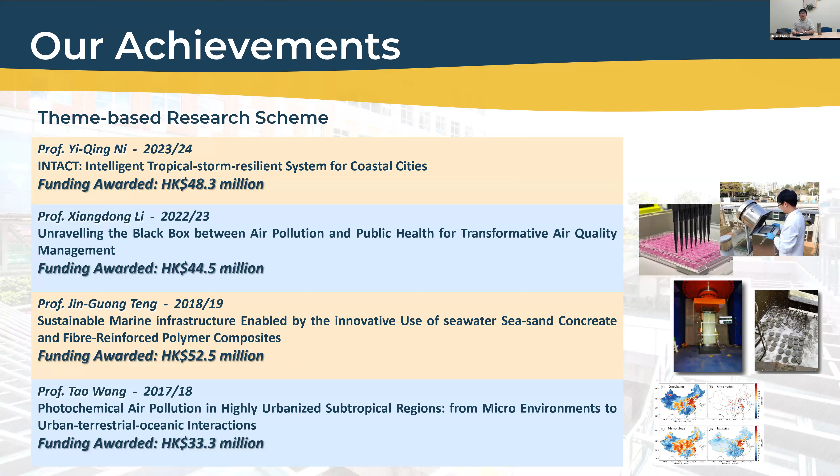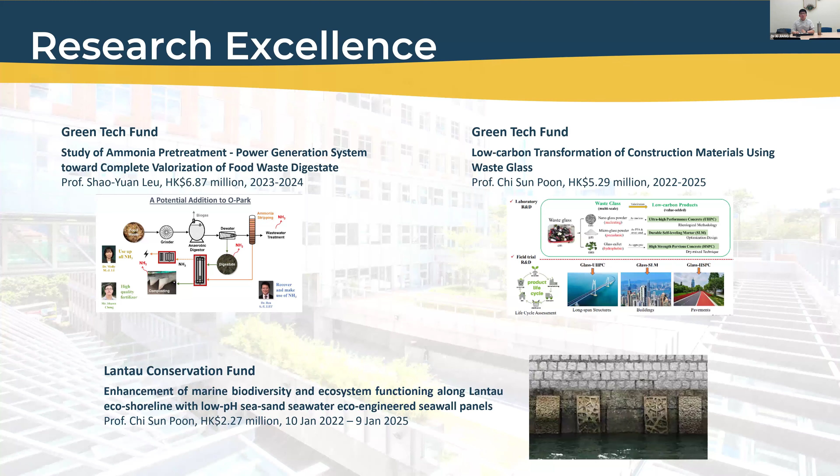We also have very good achievements in projects, such as the theme-based research scheme from Professor Ni, Professor Li Xiangdong, Professor Teng Jinguang, and Professor Wang Tao. We also obtained many special funds, such as the GTF, the Lantau Conservation Fund, the RGC Collaborative Research Fund, and Impact Fund.

Our academic programs are also very good. For undergraduate programs, we have Bachelor of Engineering degree in Civil Engineering, and in Environmental Engineering and Sustainable Development. We also have taught and research postgraduate programs, Master of Science in Civil Engineering and Master of Science in Environmental Management and Engineering. For the research postgraduate program, we have MPhil and also PhD.

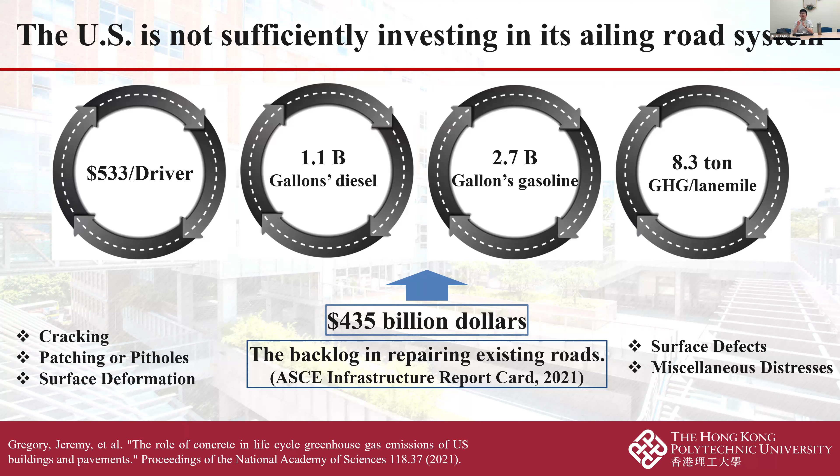Based on the ASCE, American Society of Civil Engineers Infrastructure Report Card in 2021, due to the distress of pavements in the states, such as cracking, patching, potholes, surface deformation, and surface defects, the government needs to pay $435 billion to repair existing roads. Under such circumstances, we need a new pavement structure which can both save materials and offer good properties of pavements. Today I would like to introduce one novel or unconventional pavement structure.

Its name is inverted pavement. We consider the inverted pavement as a good alternative to our conventional flexible asphalt pavement. Inverted pavement is a kind of flexible pavement structure where an unbound aggregate base (UAB) is sandwiched between a cement-treated base (CTB) and a thin asphalt concrete surface layer. Here I give you a figure: the surface layer is asphalt concrete layer, the interlayer is unbound aggregate layer, and above the subgrade soil we have the cement-treated base. So this structure looks like a sandwich, and many scholars also give this pavement structure the name sandwich pavement.

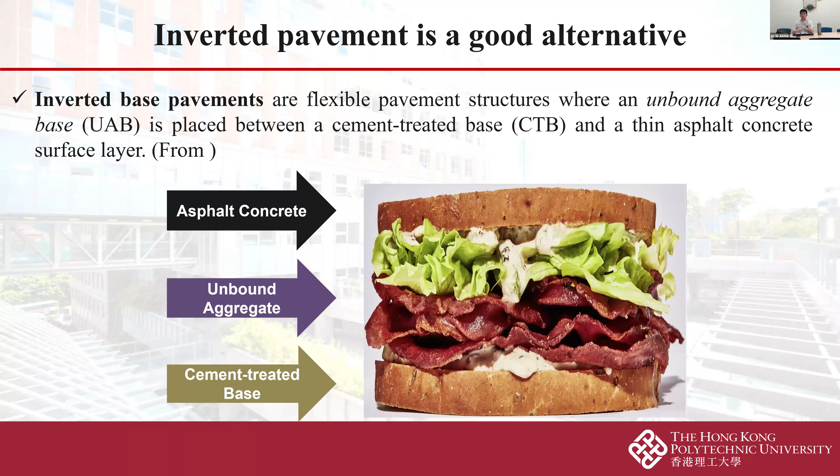Here I give a comparison study between the conventional pavement in Hong Kong and the inverted pavement structure. As you can see between the two figures, there are several differences between the two pavement structures. One is the sequence of the pavement layers.

In the conventional pavement in Hong Kong, we have the asphalt layer, unbound aggregate layer, and subgrade soil layer, just 3 layers. The modulus from the top to the bottom is decreasing with the depth of the pavement.

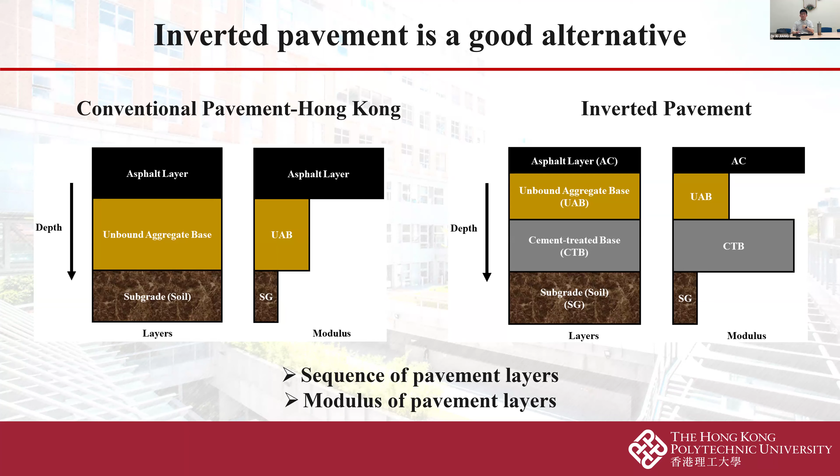However, in the inverted pavement, first of all, we have 4 layers. The surface is also the asphalt layer. Below the asphalt is the unbound aggregate base layer and cement treated base layer and subgrade soil. So as you can see, the lowest modulus layer, the unbound aggregate base, is

inserted between the asphalt layer and the cement treated base layer, which have much higher modulus. So, research gaps - why do we investigate the inverted pavement? The first gap is the limited comprehensive investigation correlating the field performance with the structural capacity of inverted pavements.

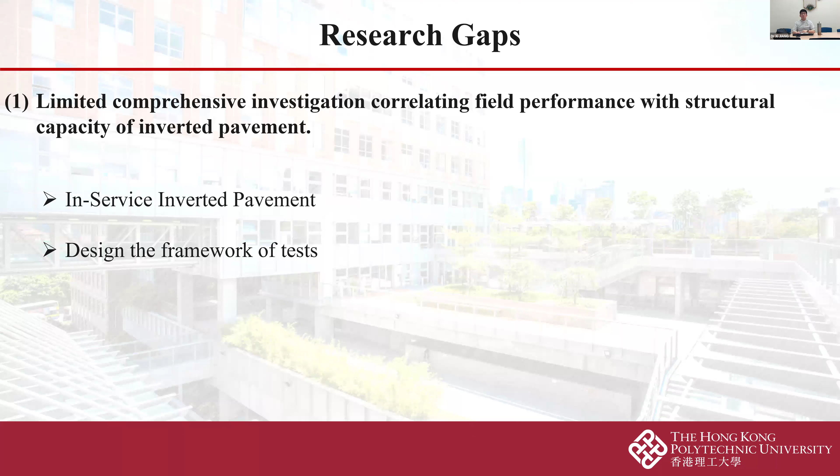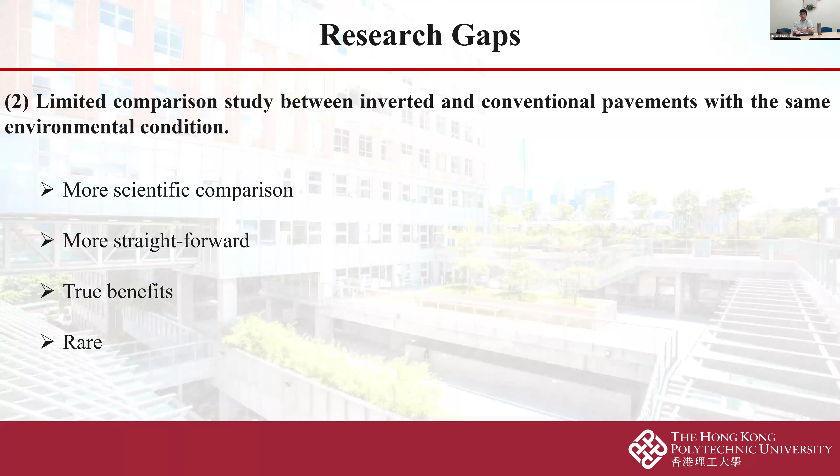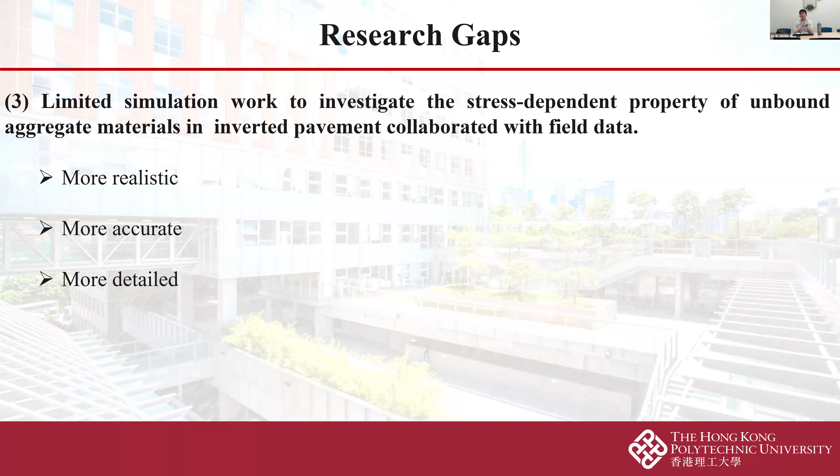We need to conduct experiments on the in-service inverted pavement, and we have to design a comprehensive framework of testing. The second gap is the limited comparison study between the inverted and conventional pavements under the same environmental conditions, such as traffic loads and the same temperature. The third research gap is the limited simulation work to investigate the stress-dependent property of the unbound aggregate materials.

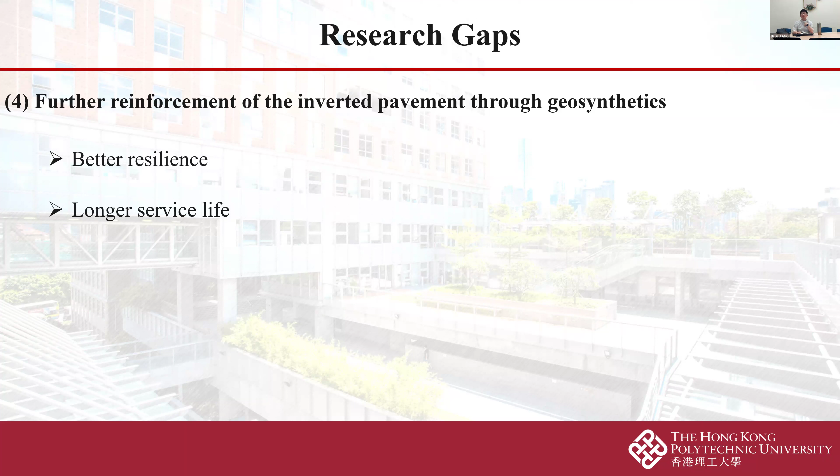Inverted pavement collaborated with the field data - the fourth one is for the reinforcement of the inverted pavement through geosynthetics. So here is the outline of the whole research project. The objective is to give a comprehensive investigation on the inverted pavement and advance the understanding of the inverted

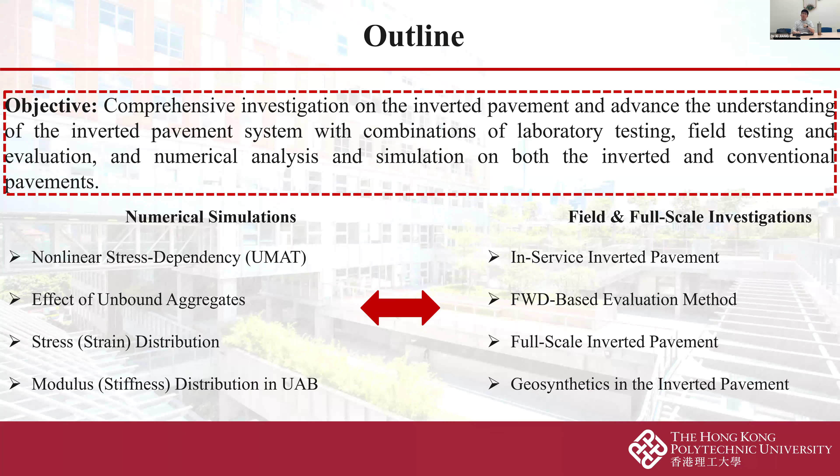pavement system with a combination of laboratory testing, field testing and evaluation, and numerical analysis and simulation on both the inverted and conventional pavements. So we need to conduct field and full-scale investigation, and we also need to do numerical simulations to verify our test results.

So here are the research contents. We have 5 steps. The first one: we have to do preliminary numerical simulations, focusing on the stress-dependent stiffness property of the unbound aggregate. Many years ago, we had the classical K-theta model to predict the stiffening characteristics of the unbound aggregate base.

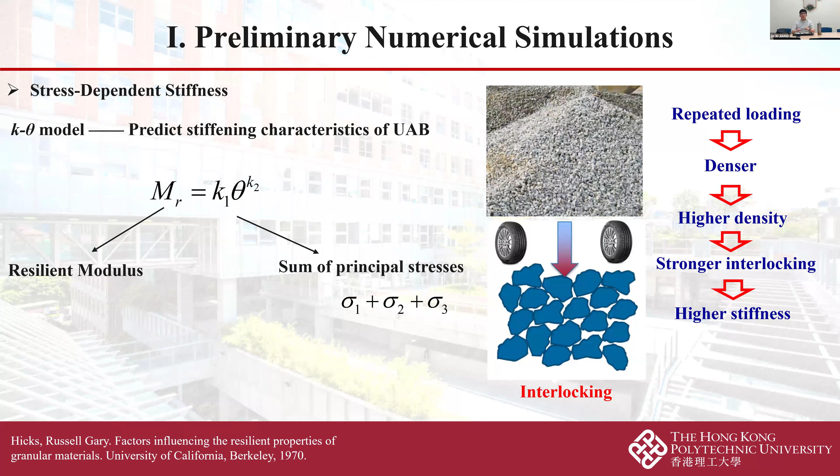Since we know that the aggregates, under repeated loading, will become denser and have higher density and stronger interlocking, and then higher stiffness. Due to this special property, we have to conduct simulation work to simulate the stress-dependent property.

So then we want to take the dimensional change into consideration. Then we have the shear stress component. In this constitutive model, the octahedral shear stress term is added to this model.

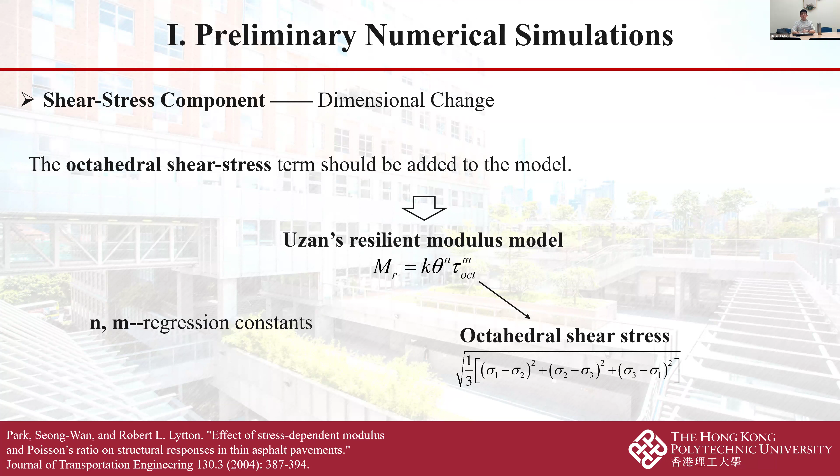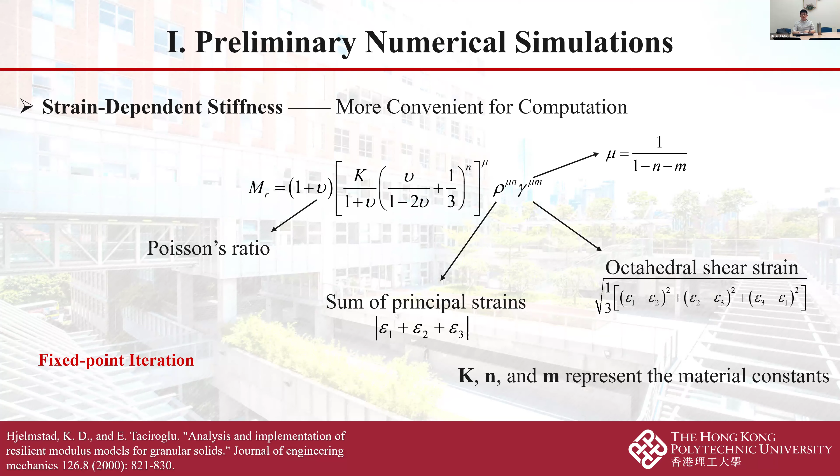This is the stress-dependent simulation model. In this model, especially when we use commercial simulation software such as Abaqus to do the calculation, we waste a lot of time and need more calculation capacity. So then we change the stress-dependent model to a strain-dependent model, which is more convenient for computation. In this strain-dependent model, we use the fixed point iteration.

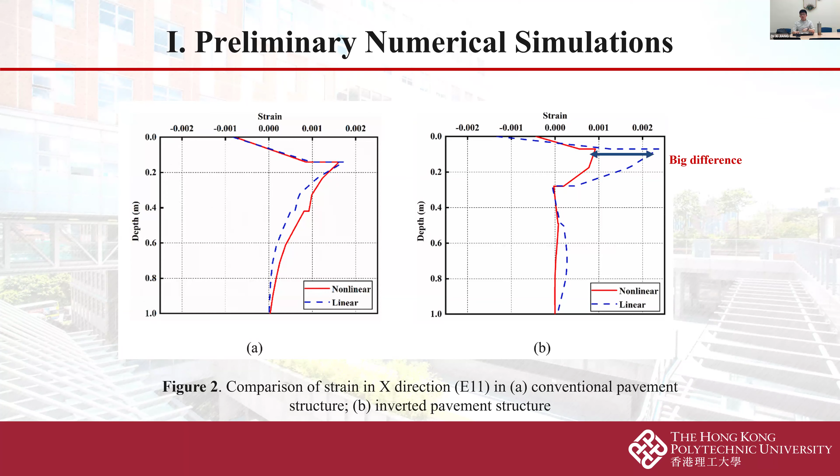So here are the simulation work results. I give you the comparison between the inverted pavement and the conventional pavement, using both the nonlinear model and the linear model. Here are the comparisons of the strain in the X direction, and we also compared the deflection in both the two different pavement structures.

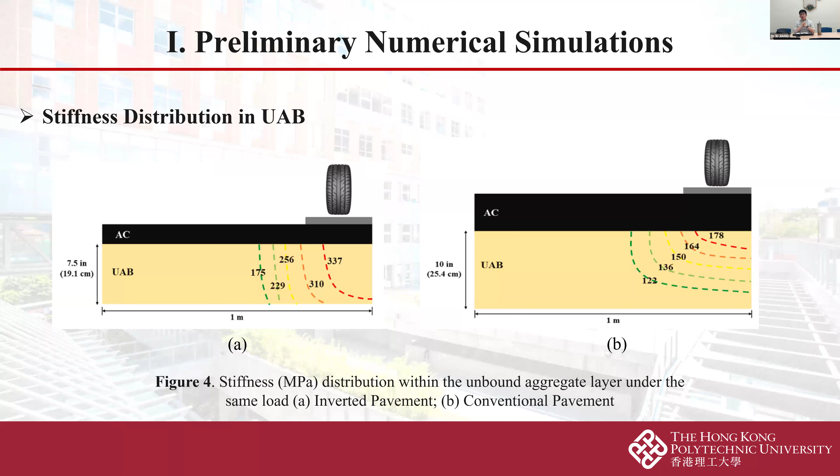And then we can have the output of the stiffness distribution within the unbound aggregate base. As you can see, figure A is the inverted pavement, figure B is the conventional pavement. In the unbound aggregate base of the inverted pavement, as the distance from the loading point or loading area increases, the stiffness or modulus of the unbound aggregate base will decrease a lot. However, in the conventional pavement, the stiffness of the unbound aggregate base didn't change a lot.

So we have the highlights for the preliminary numerical simulations. The first is that the nonlinear stress-dependent characteristic of the unbound aggregate base layer has a larger influence on the structural response of the inverted pavement, but little effect could be found in the conventional pavement.

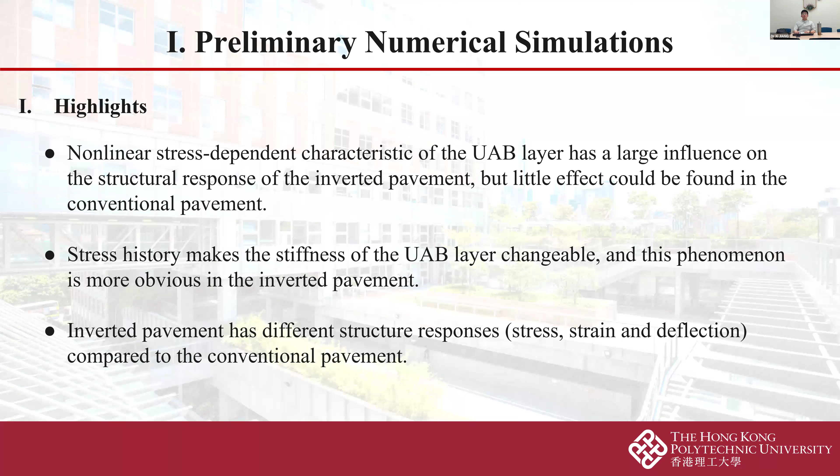The second is that stress history makes the stiffness of the unbound aggregate base layer changeable, and this phenomenon is more obvious in the inverted pavement. The last one is that the inverted pavement has different structural responses, such as stress, strain, and deflection, compared to the conventional flexible pavement structure in Hong Kong.

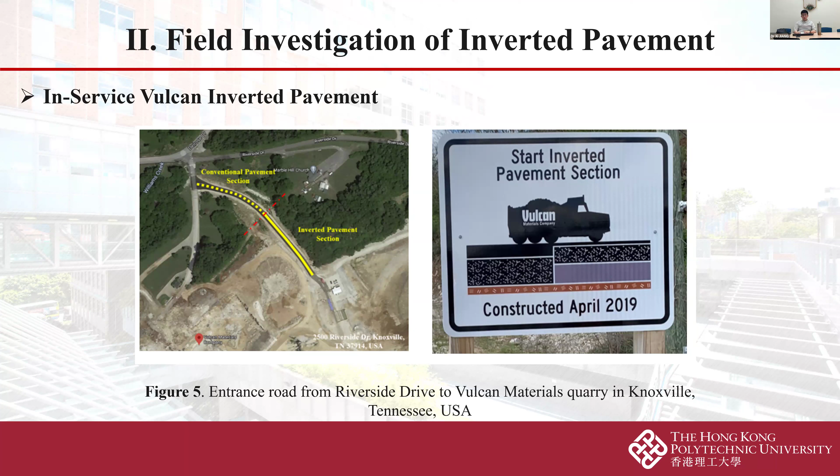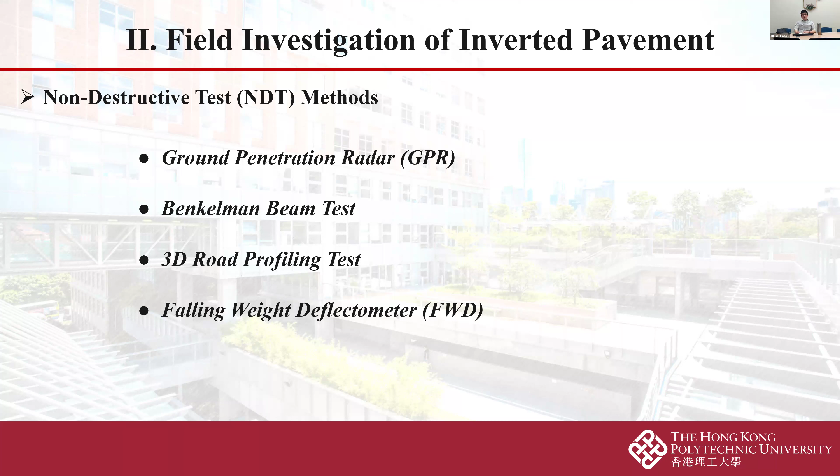After the preliminary numerical simulations, we have to do some tests for field investigation of the inverted pavement. We found an in-service inverted pavement in the city of Knoxville, Tennessee, in the United States of America. Firstly, we conducted non-destructive tests such as GPR (ground penetrating radar), Benkelman beam test, 3D road profiling test, and also the falling weight deflectometer. First of all, we conducted the GPR test to validate the pavement layer thickness.

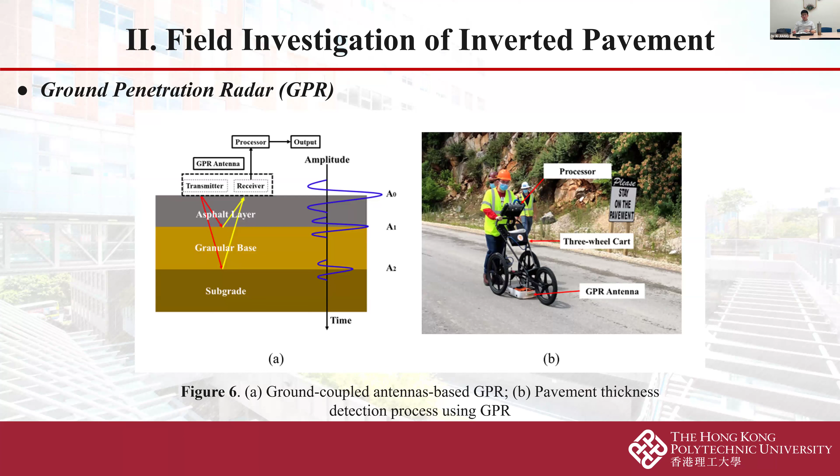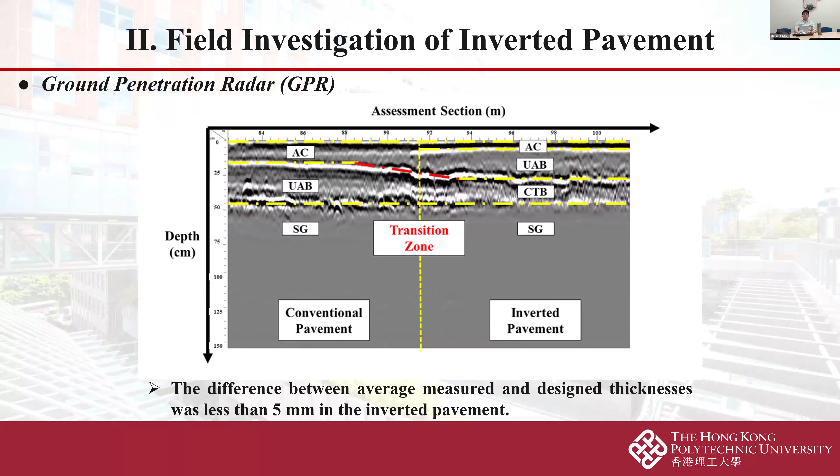Due to construction quality, sometimes we give you a design thickness for pavement structures, but the construction quality is not guaranteed, so there is some difference between design thickness and construction thickness. Based on the GPR results, we found that the difference between the average measured and designed thickness was less than 5 millimeters in the inverted pavement, showing that the construction quality is very good.

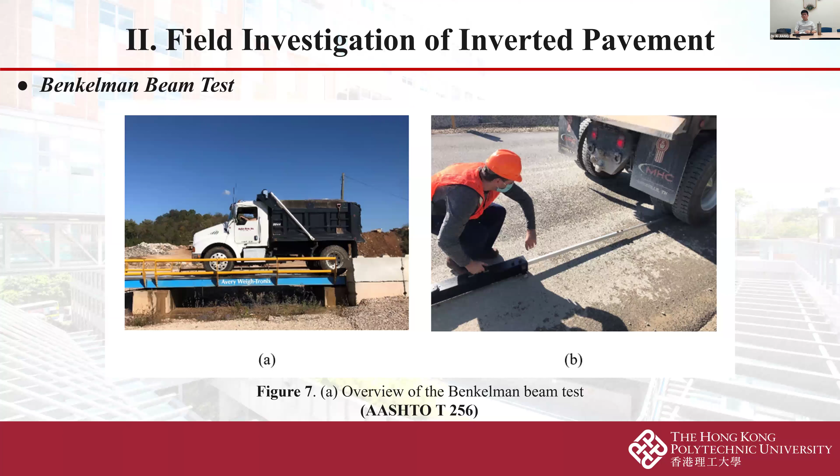So then we conducted the classic Benkelman beam test. Here are the figures showing an overview of the Benkelman beam test. Usually an 80 kilonewton test load is applied on a single rear axle, and the beam is placed between the tires so that the probe is 1.37 meters forward of the rear axle.

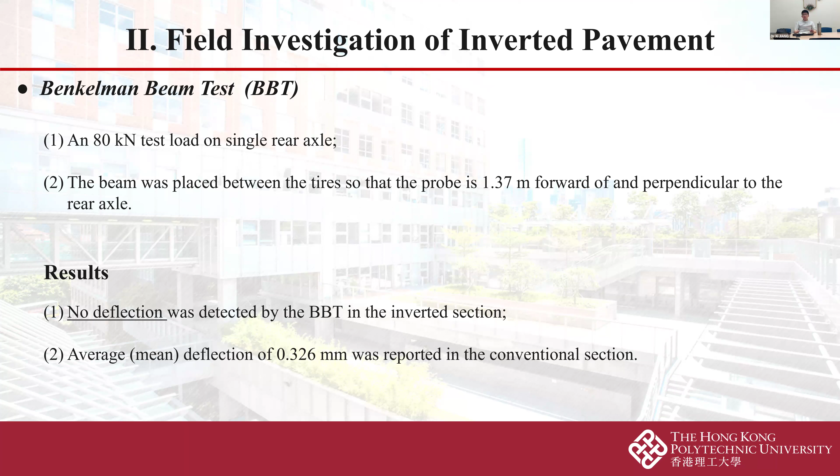So we have the results. First, no deflection was detected by the BBT in the inverted section. Second, an average deflection of 0.326 millimeters was reported in the conventional section. This means that the inverted pavement has a better condition compared to the conventional section.

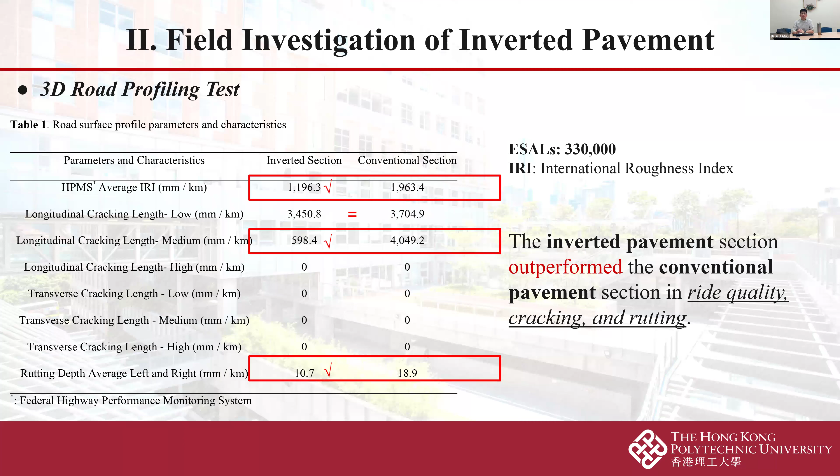Then we conducted the 3D road profiling test, measuring the cracking length in both the longitudinal and transverse directions. We also measured the IRI, the International Roughness Index, and the rutting depth. Based on the results, we found that the inverted pavement section outperformed the conventional pavement section in ride quality, cracking, and rutting as well.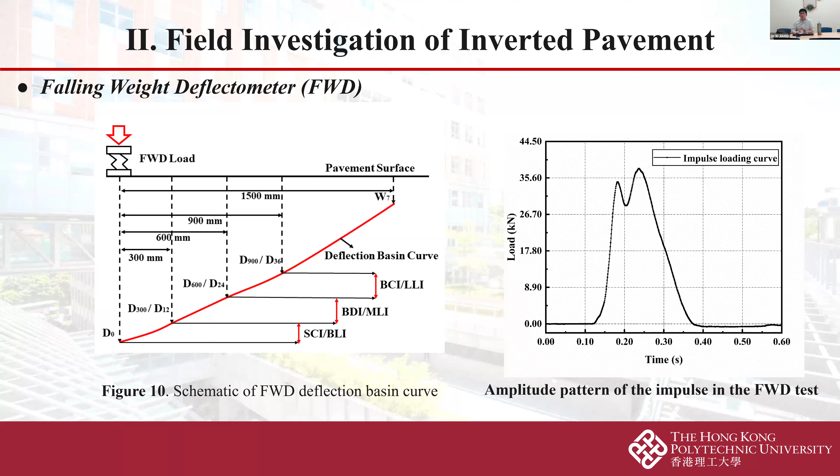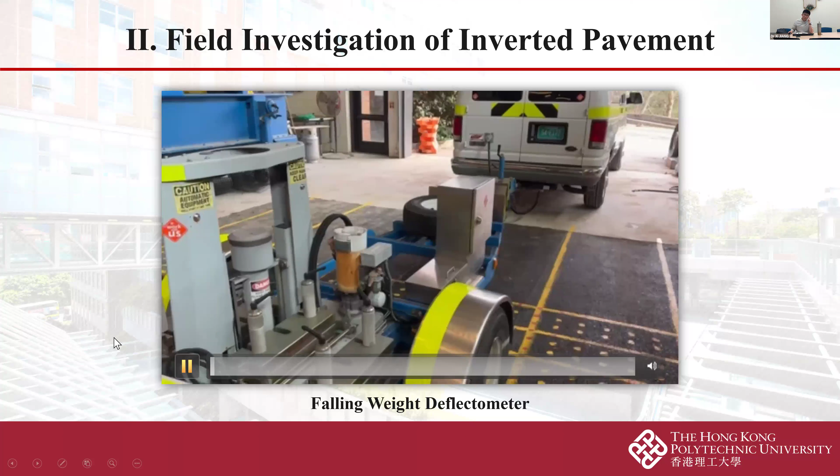Here is the law behind the test: the FWD test applies an FWD load, and there is a distance from the load point. The FWD load has an amplitude pattern of the impulse load in the FWD test. Here is a short video showing how the falling weight deflectometer performs the motion test on the pavement surface.

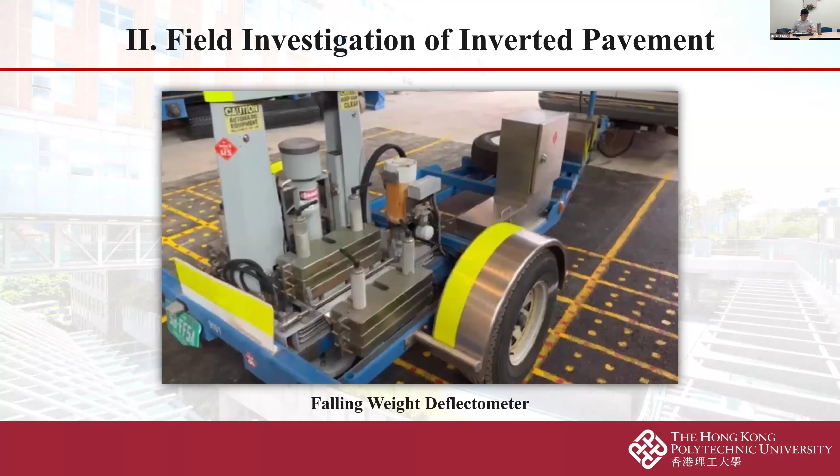So then for the Vulcan inverted pavement, we also conducted a cost analysis. We used the EUAC, the estimated uniform annual cost, to calculate and compare which pavement structure is more cost efficient. We give all the cost analysis of the testing pavements, then we can calculate the total cost in USD per lane mile.

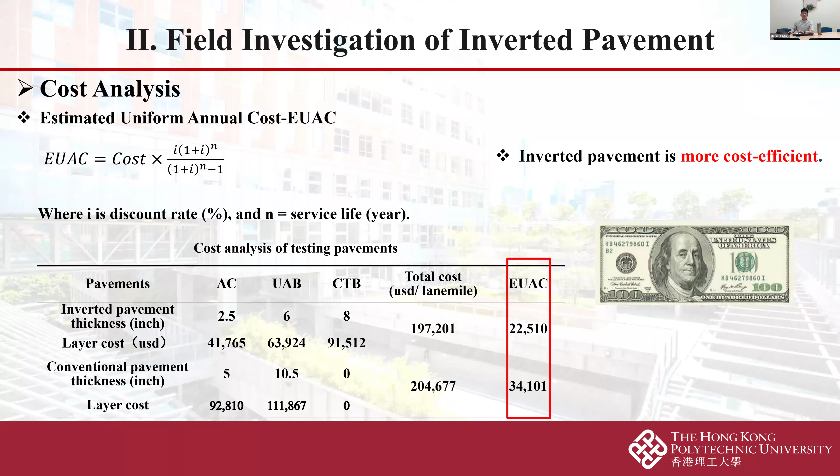So then we got the results: for the inverted pavement the EUAC value is around 22,000, and for the conventional pavement structure it is around 34,000. So we can conclude that the inverted pavement is more cost efficient, based on the data from the in-service Vulcan inverted pavement.

So just now I introduced the FWD test. Based on the FWD test, we can get the data to draw the deflection basin curve. Based on the deflection basin parameters, we can get D0, D300, D600, and D900 to calculate the surface SCI value, BDI value, and BCI value.

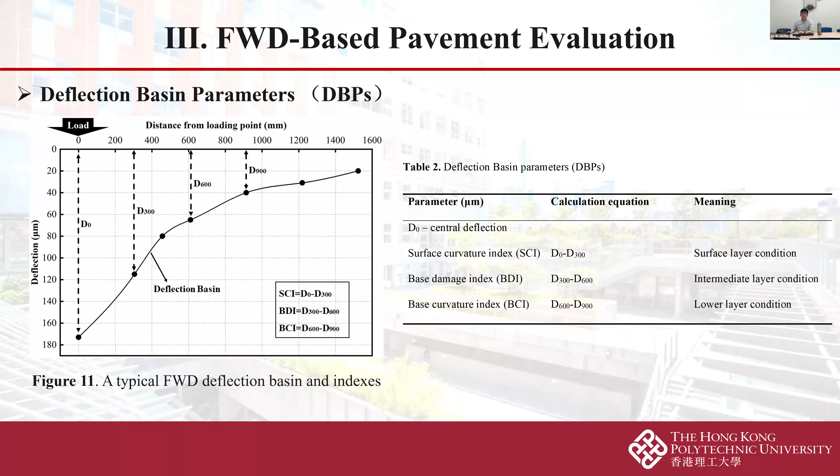Here I give you the meaning of the different names: SCI tells you the surface layer condition, BDI tells you the intermediate layer condition, and BCI tells you the lower layer condition. Based on the data from the Vulcan inverted pavement, we got the SCI value, the BDI value, and also the BCI value.

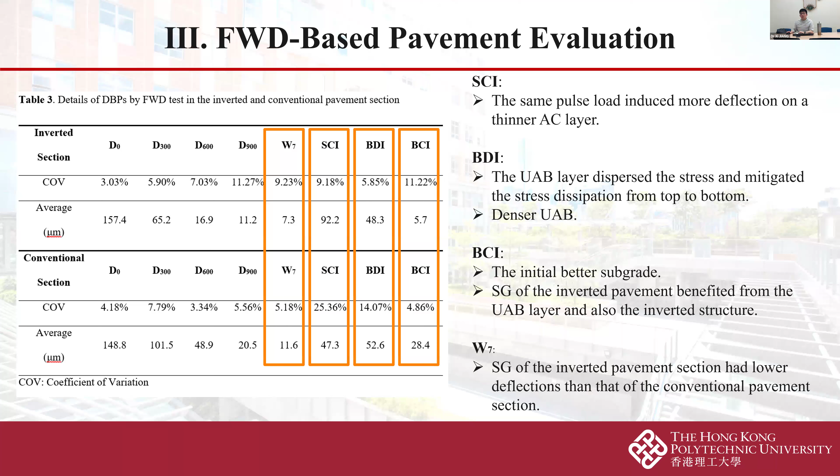Based on the SCI comparison, we found that the same pulse load induced more deflection on a thinner asphalt layer. For the BDI value, we found that the unbound aggregate base layer dispersed the stress and mitigated stress dissipation from top to bottom, due to the denser unbound aggregate base. For the BCI value, we found that the subgrade of the inverted pavement benefited from the UAB layer and the inverted structure.

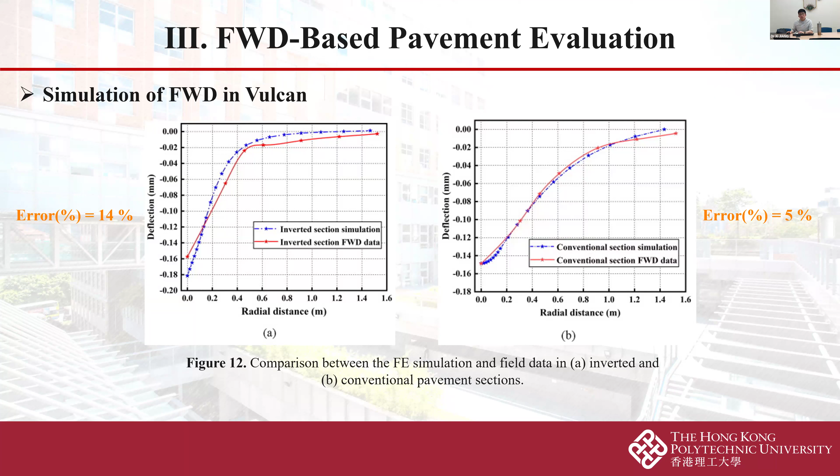So then we used nonlinear simulation software to do the numerical simulation, and the error percentage is within 15%. Then we made a comparison study between the finite element simulation and the field data in the inverted and conventional pavement sections.

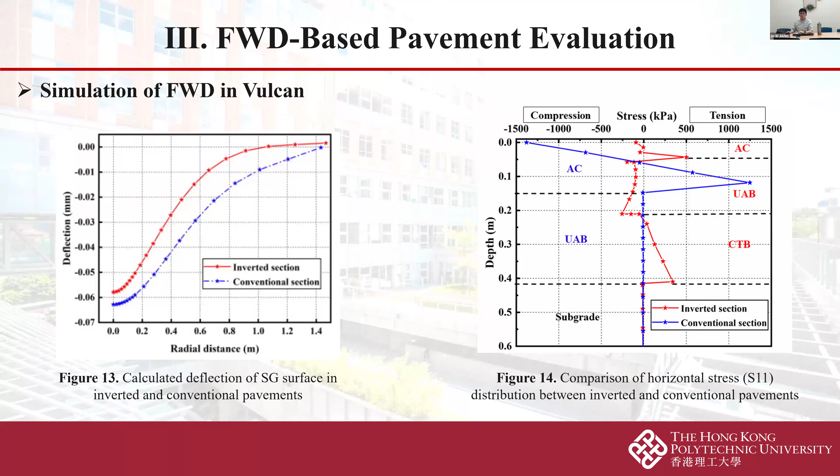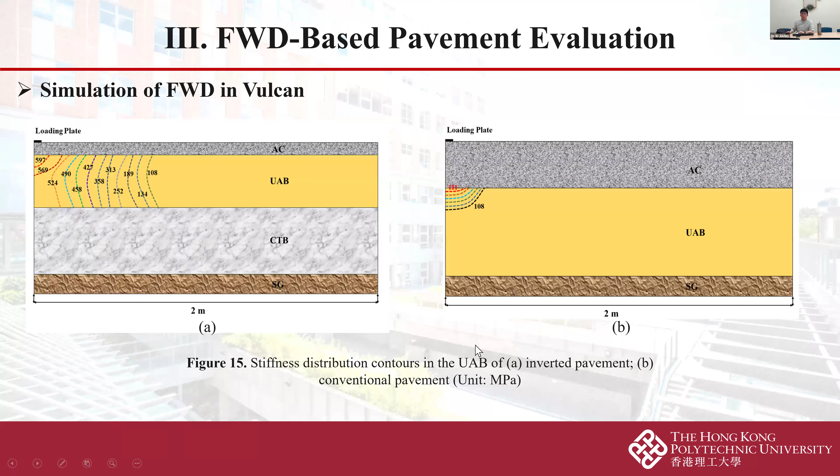So both figures show that the inverted pavements outperformed the conventional pavement structures in deflection and stress distribution. Then, based on the simulation work of the FWD data in the Vulcan inverted pavement, we also found that in the inverted pavement's unbound aggregate base there is a very obvious stress-dependent phenomenon, but in the conventional pavement the change of stress in the unbound aggregate base is very small, so there is no obvious stress-dependent property.

So we have the FWD data. We also introduced the SCI and BDI values to briefly evaluate the pavement performance. Then we wanted to know how to use this method to assess the inverted pavement more comprehensively.

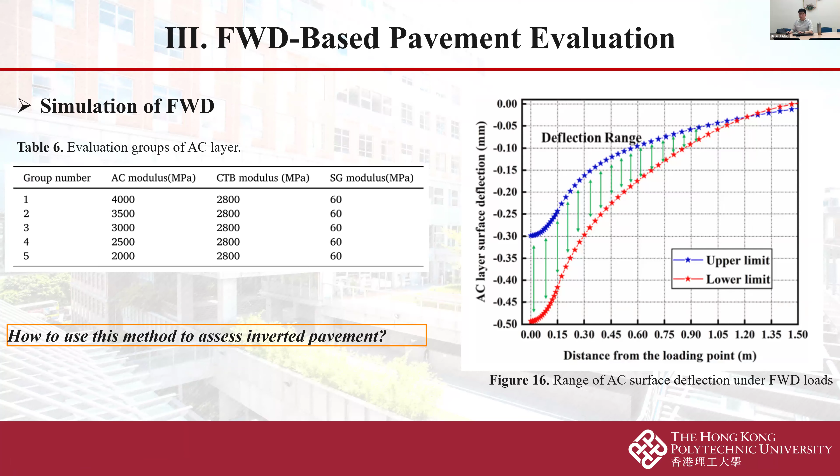So we changed the modulus of the asphalt concrete layer, cement treated base layer, and subgrade soil layer. Due to the stress-dependent property of the unbound aggregate base, we didn't assign different modulus values to it. We can also see the deflection range of the asphalt concrete layer surface under the FWD loads.

First we changed the modulus of the asphalt concrete layer, then the modulus of the cement treated base layer, and lastly the modulus of the subgrade. We find that when we change the modulus of the subgrade, shown on the figure on the right, the deflection changes the most.

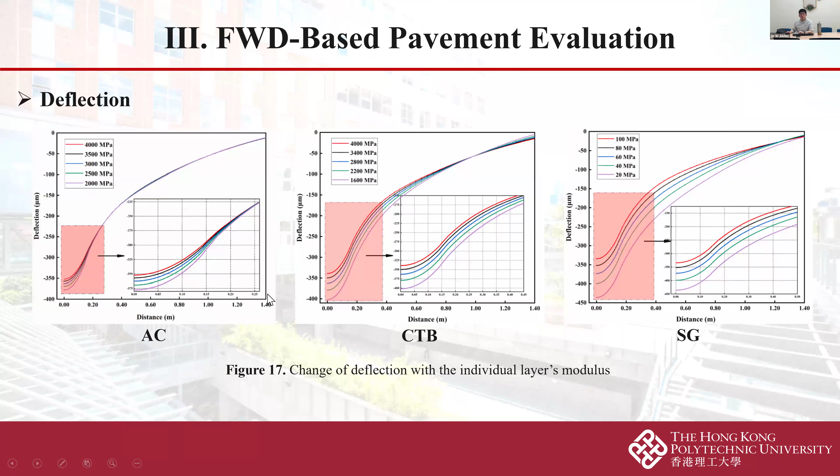When we change the modulus of the asphalt surface layer, the deflection change is very limited. Then we compare the SCI, BDI, and BCI values.

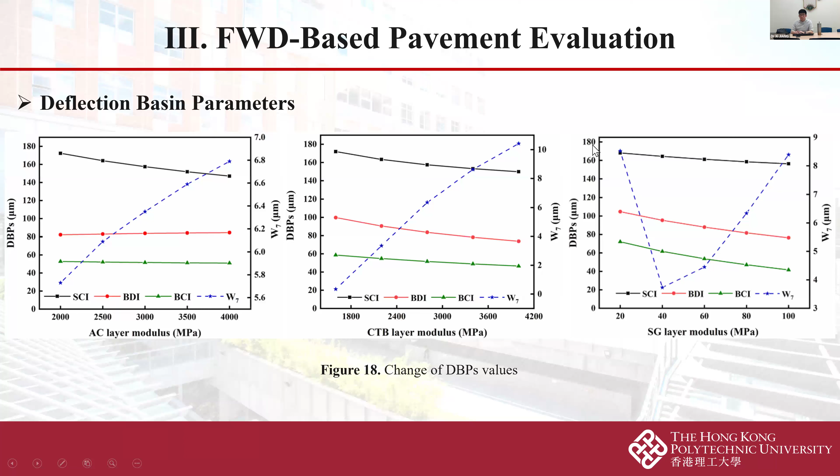With the change of the different layers' modulus, we can draw the same conclusion: the modulus of the subgrade layer contributes most to the deflection of the inverted pavement structure.

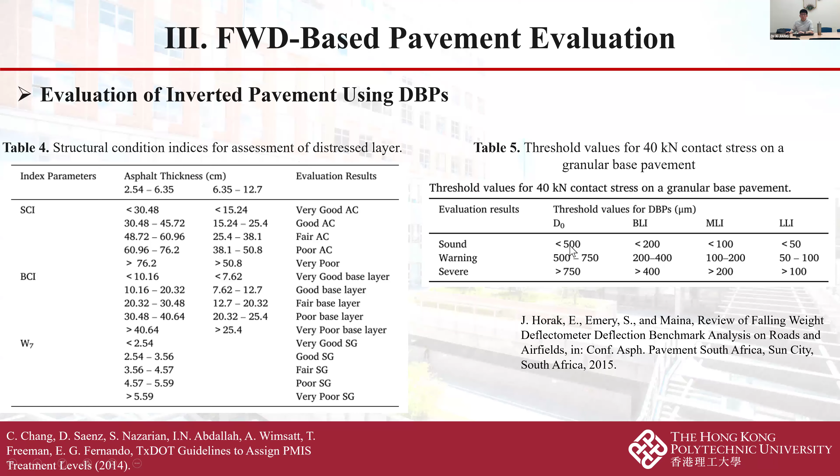We found the evaluation index parameters for the different asphalt thicknesses, different evaluation ranges, and the evaluation results. Table 4 and Table 5 present two evaluation systems.

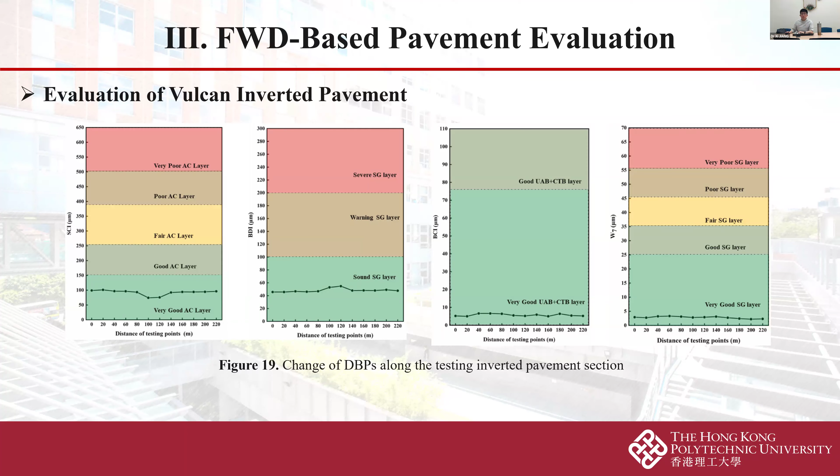Based on the two systems, we drew Figure 19, showing the change of the DBP along the testing inverted pavement section. We find that after 2 years of service, the inverted pavement, all its layers, are in very good condition.

In the fourth chapter, we conducted the full-scale APT test, the accelerated pavement testing. This test was also done in the United States, at the University of Tennessee. Here I give you the dimensions: the length, the width, and the height.

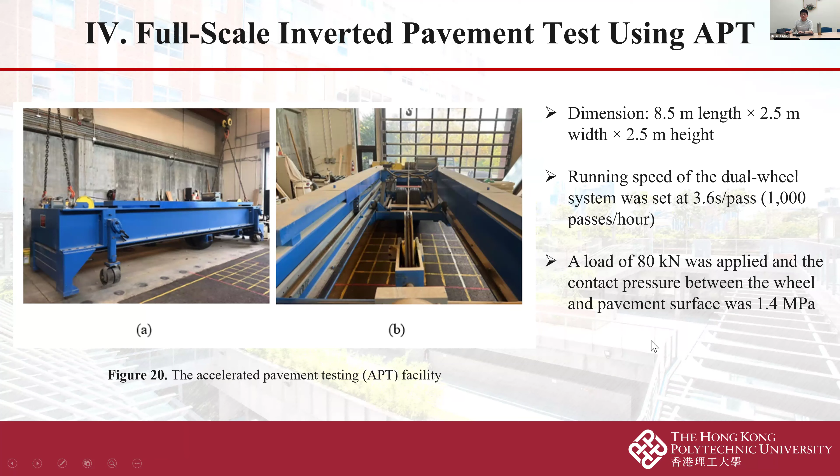The running speed of the dual wheel system was set at 3.6 seconds per pass, around 1,000 passes per hour. A load of 80 kilonewtons was applied, and the contact pressure between the wheel and pavement surface was 1.4 megapascals.

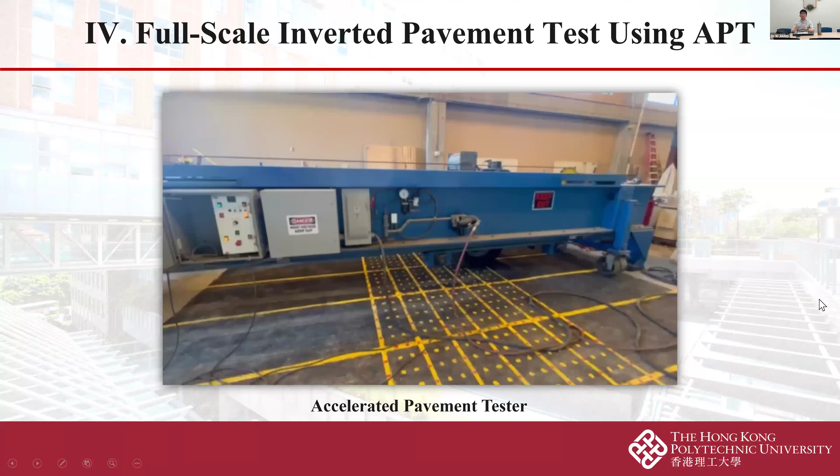Here is a short video to show you how this machine tests.

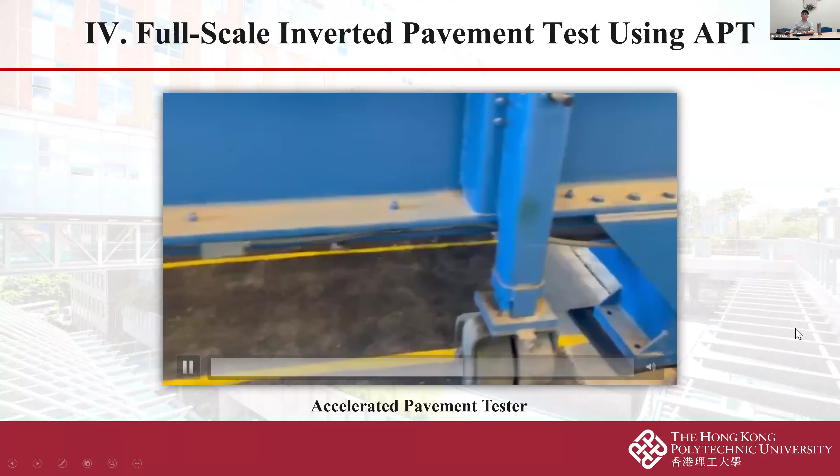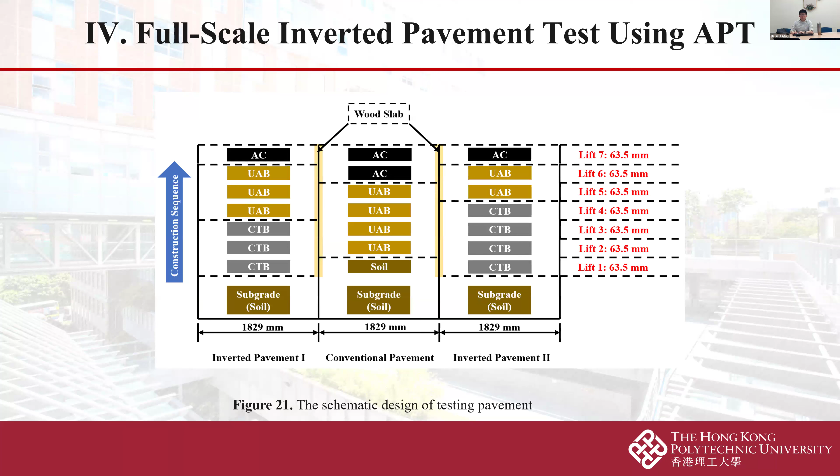So then we have a pavement pit, divided into three lanes. The middle one is the benchmark for comparison, and the lanes on the left and right are inverted pavements with different thicknesses of unbound aggregate base and cemented base.

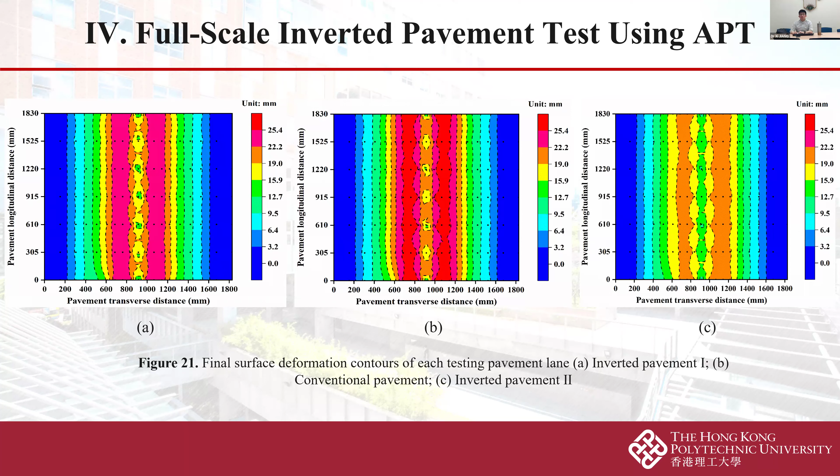After finishing the test, we drew the surface deflection contour map. As you can see, figure B is the conventional pavement, and it has the largest deflection value compared to the inverted pavement lanes on the left and right.

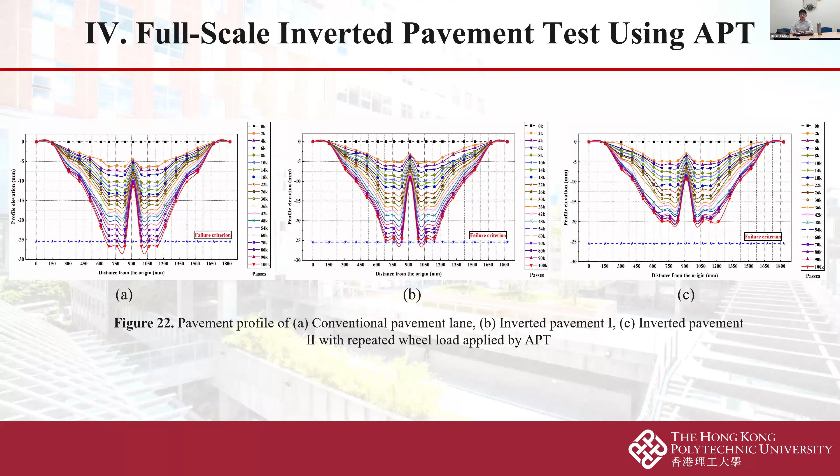We also drew the pavement profile based on the surface deflection. Figure A is the conventional pavement lane. As you can see, figure A has passed the failure criterion value, while the inverted pavement on the right, figure C, has the smallest deflection value.

The last chapter addresses how we can further reinforce the inverted pavement. We considered using geosynthetics, geogrids, and conducted a second round of testing.

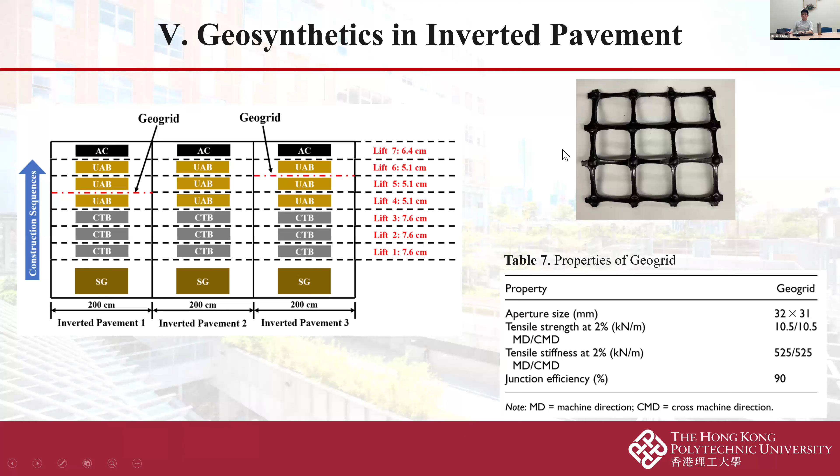We used the same pit, but inserted geogrid layers within the unbound aggregate base at different locations: one at the upper one-third layer, and one at the lower one-third layer. Table 7 gives the properties of the geogrid, including aperture size, tensile strength, tensile stiffness, and junction efficiency.

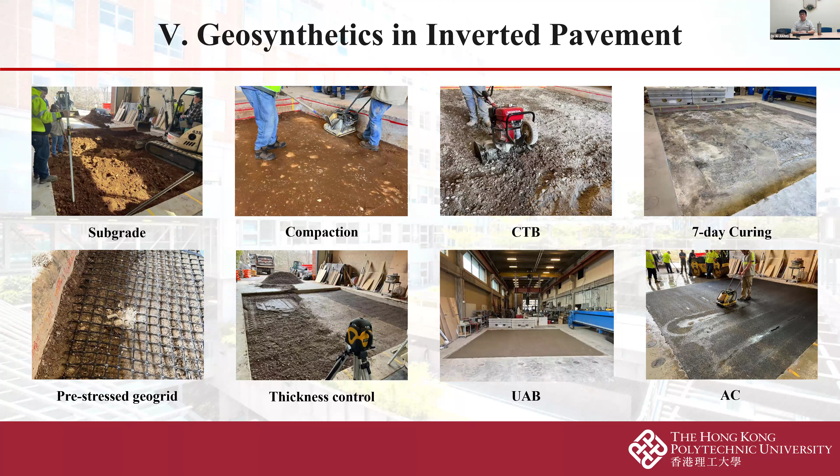We mix 4% cement with the aggregates and spray some water. After 7 days of curing, we place the unbound aggregate base layer, insert the pre-stressed geogrid within it, compact it, and then place the asphalt surface layer.

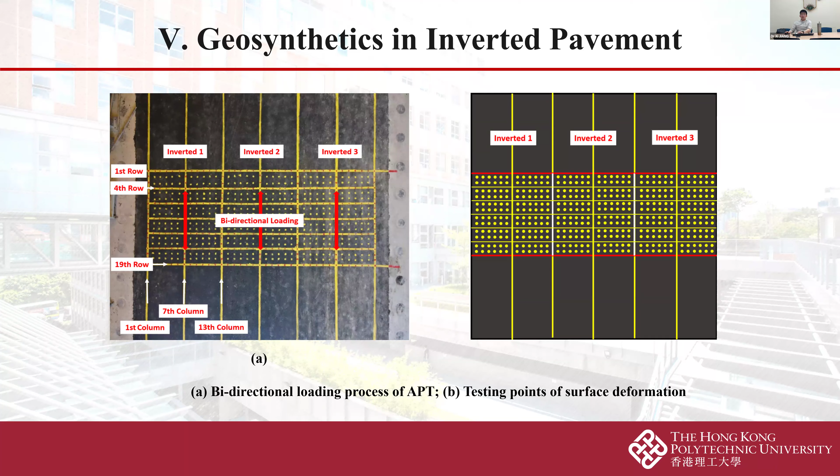Here I marked a lot of points on the pavement surface to do the deflection testing. Figure A shows the APT, which is a bidirectional loading process, and figure B shows the testing points of the surface deformation.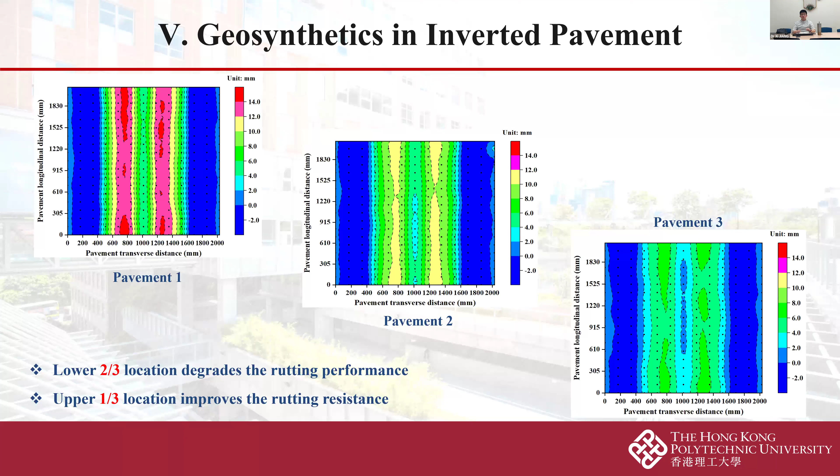So why does the lower 2/3 location degrade the rutting performance? After the test, we found this result is due to improper placement of the geogrids.

Based on the testing data, we have evaluation indexes such as RRR, TBR, and ROD. The first one is the rutting reduction ratio, traffic benefit ratio, and rate of deformation. RRR represents the ratio of the rutting depth of the reinforced inverted pavement to that of the unreinforced inverted pavement lane at the same number of load cycles.

Here we set 150K as the number. TBR is defined as the ratio of the required number of load cycles to reach a certain rutting depth in the reinforced inverted pavement lane to the required number of load cycles to meet the same rutting depth. Here we set 9 millimeters as the standard value in the unreinforced inverted pavement lane.

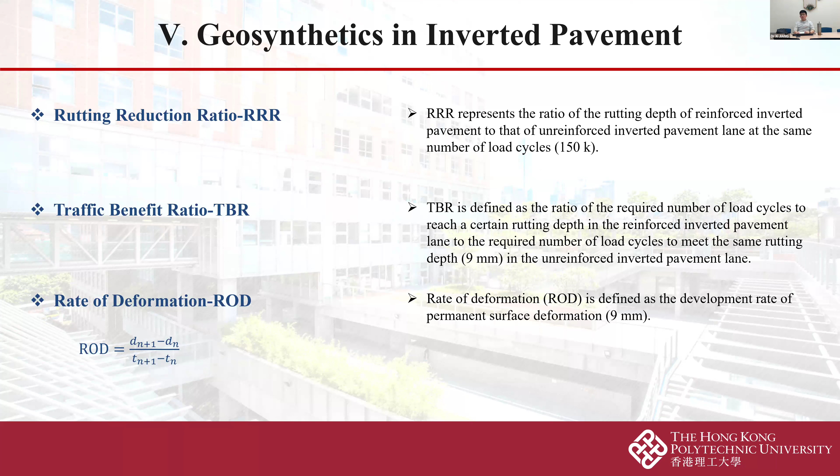And ROD, rate of deformation, is defined as the development rate of the permanent surface deformation. Here we set the value as 9 millimeters.

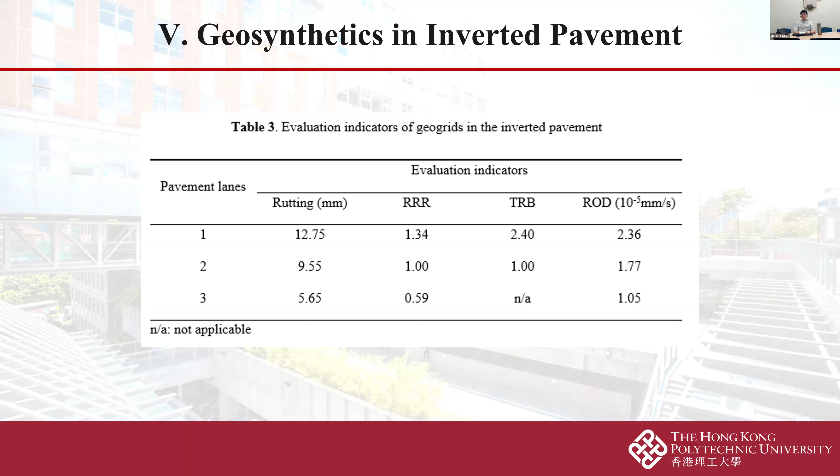Then we obtained the calculation results and drew this table, and found that pavement number 3, the inverted pavement, has the best performance.

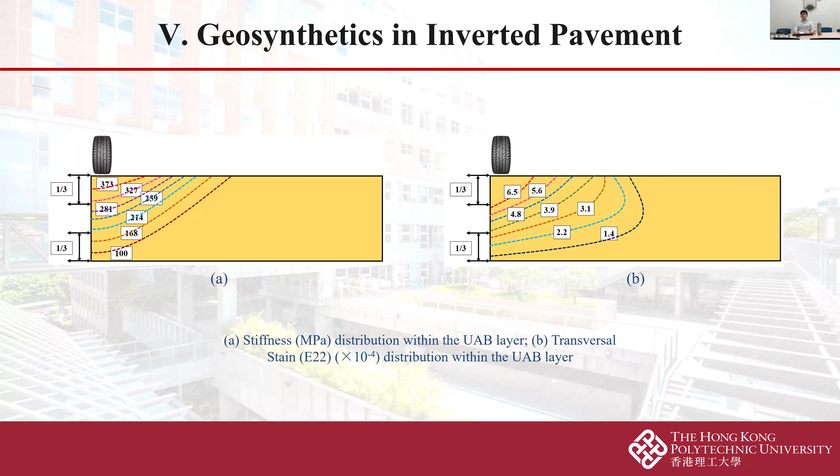We also cooperated the testing data with the simulation work to validate the stress-dependent property of the unbound aggregate base layer in the inverted pavement. Figure A is the stiffness distribution, and figure B is the strain distribution. At the beginning of the presentation, I introduced that we developed a new constitutive model from stress-dependent to strain-dependent, so here we also focus on the strain distribution within the unbound aggregate base.

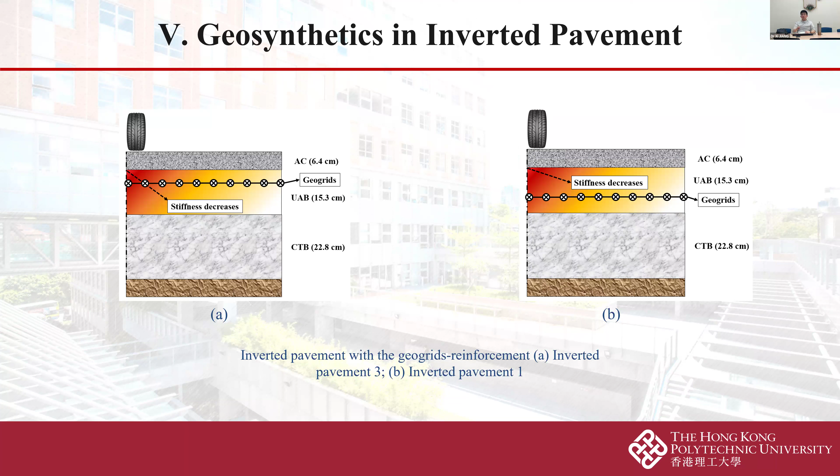We drew this figure to show that within the unbound aggregate base layer, the stiffness decreases with the distance from the loading points or loading areas. Here are the pavement trench cuts showing the deflection or permanent deformation of each layer of the pavement structures.

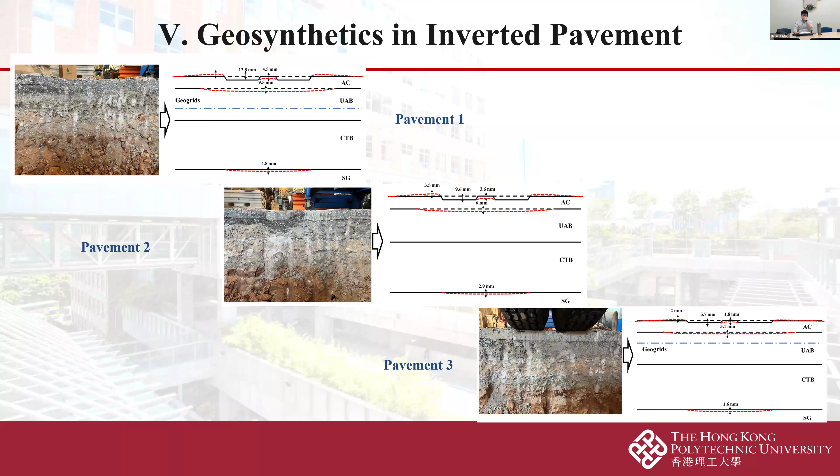Finally, this research is still going on. Many data we have not finished analyzing. So based on all the data we have finished analyzing, we can draw the following conclusions.

The first one is that the nonlinear stress-dependent characteristic of the unbound aggregate base layer has a large influence on the structural response of the inverted pavement, but little effect could be found in the conventional pavement.

The second one is that the stress history makes the stiffness of the unbound aggregate base layer changeable, and this phenomenon is more obvious in the inverted pavement.

The third one is that based on the overall performance, both the field and the testing data, the inverted pavement can be regarded as a good alternative to the conventional or traditional flexible pavement.

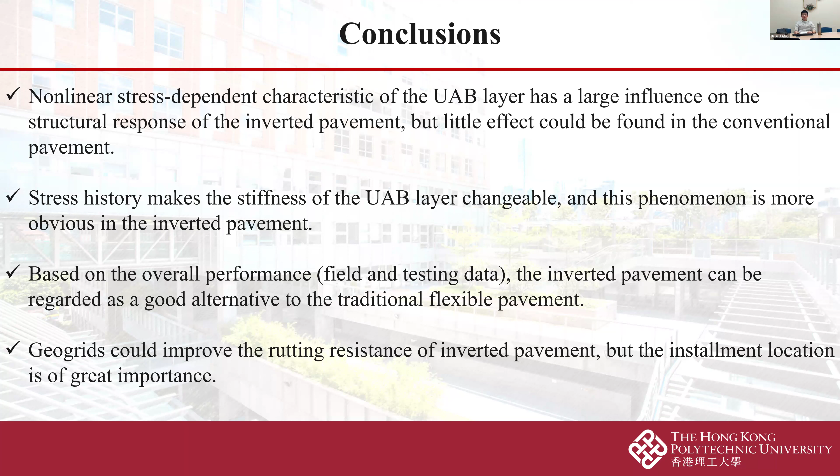And the last one is that geogrids could improve the rutting resistance of the inverted pavement, but the installation location is of great importance.

So thank you, everyone. That's my presentation.